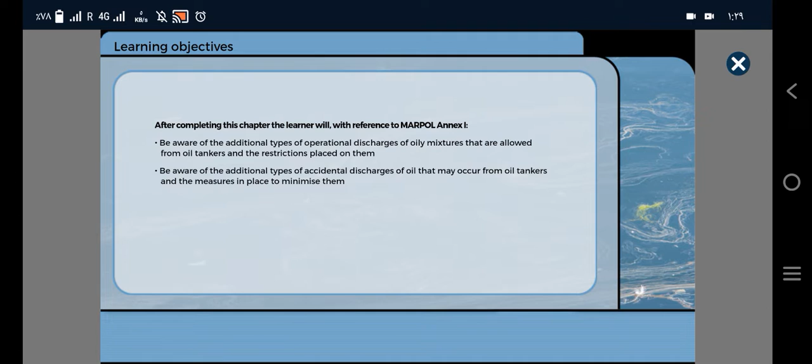Oil tankers make additional types of operational discharges of oily mixtures when it is necessary to dispose of water which has been mixed with oil cargo. This will normally occur when the cargo tanks need to be cleaned or ballasted.

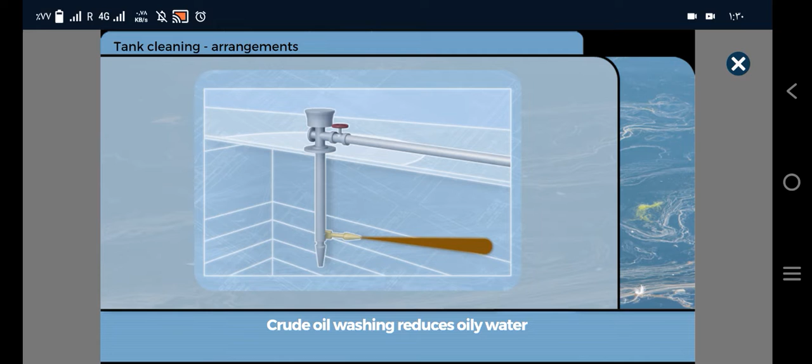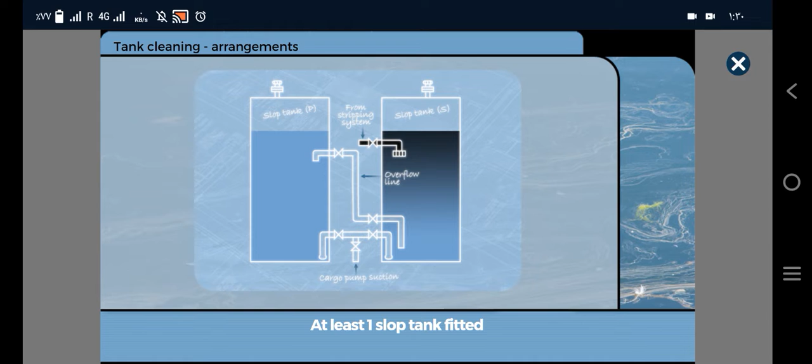Annex 1 requires most crude oil tankers to be fitted with crude oil washing systems, so water washing is used as little as possible. Even on a crude oil tanker, water washing of cargo tanks will be necessary sometimes. Annex 1 requires oil tankers to be provided with at least one slop tank to allow collection of tank washing water, and to allow the oily mixture to settle out before the clean water is discharged overboard.

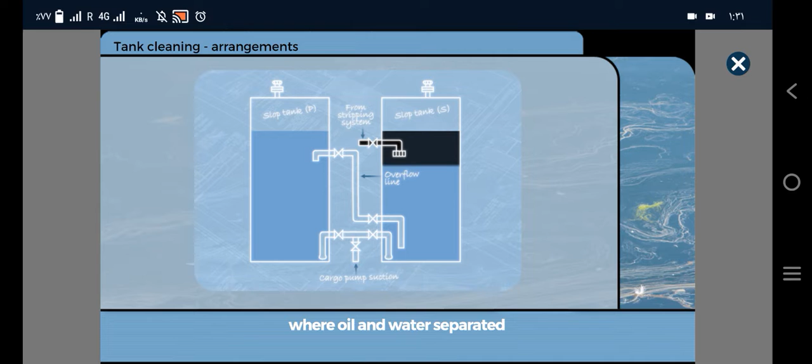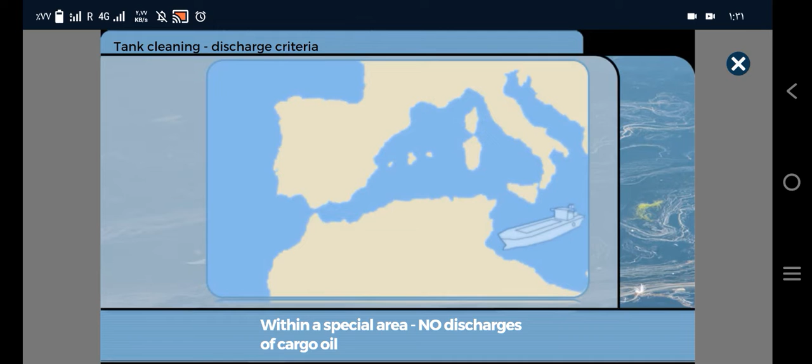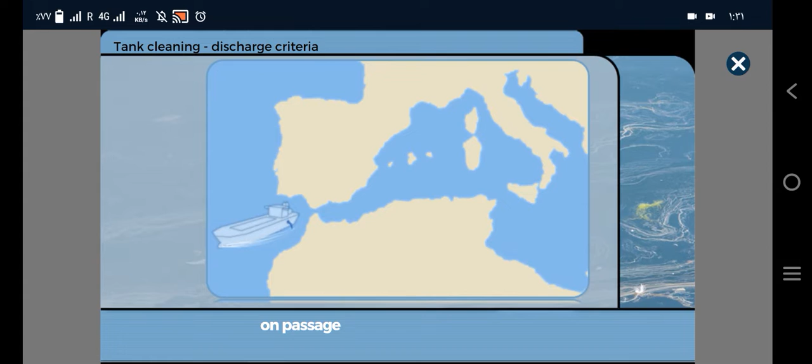The discharge criteria for tank washings are different to those for machinery space bilge water. Within a special area, no discharges of oil from the cargo area are allowed. Outside special areas, MARPOL has conditions that must be satisfied. These require the ship to be on passage, be a minimum distance from land, limit the rate of oil discharge, and the total amount of oil to be a small proportion of the cargo loaded.

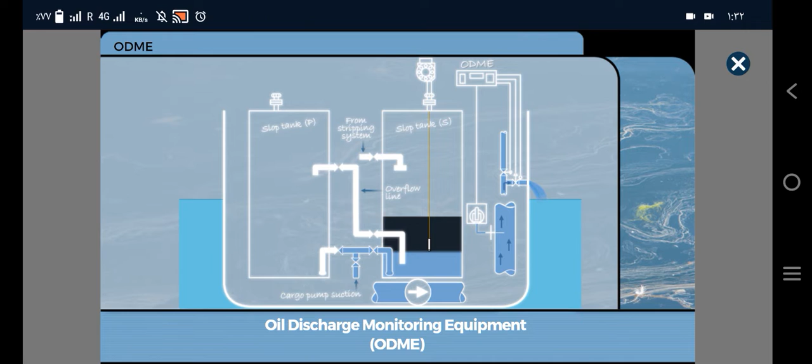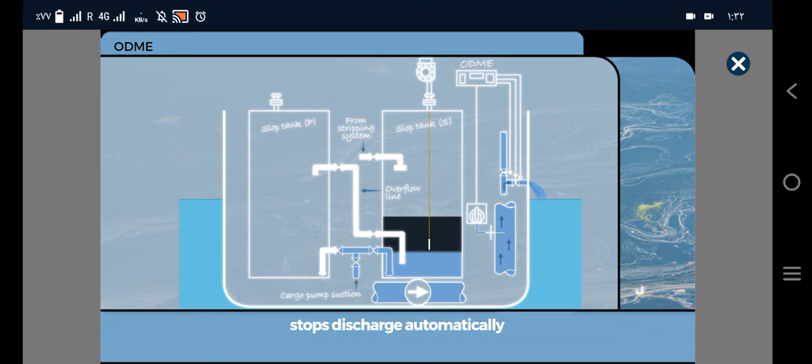The rate of discharge of oil and the total quantity discharged are measured using Oil Discharge Monitoring Equipment, ODME. In the event of the oil content exceeding a MARPOL limit, or the ODME failing, the overboard discharge will be stopped automatically. As a double check, oil-contaminated water from cargo tank areas is led to the open deck or to the ship's side above the waterline so that it can be visually checked for oil traces.

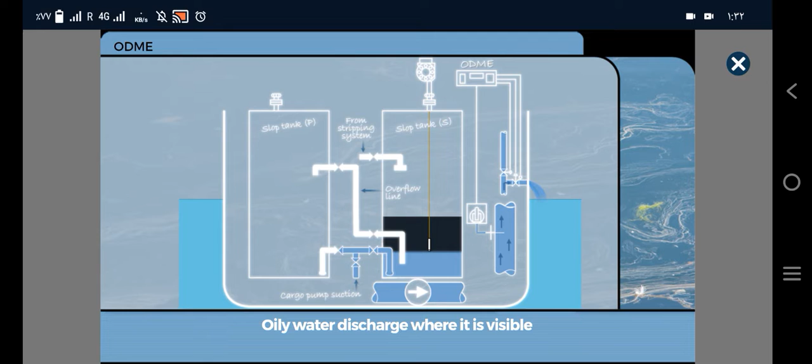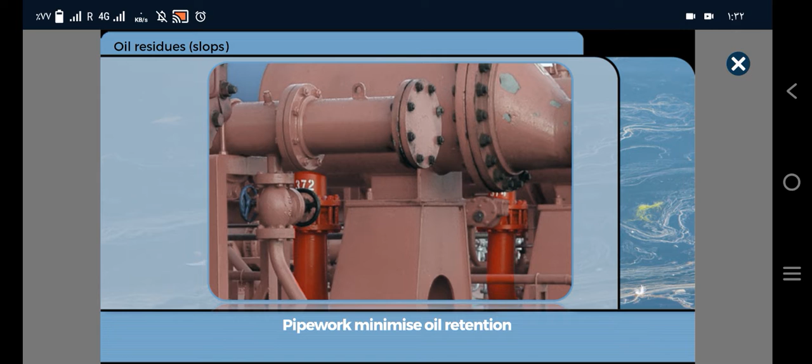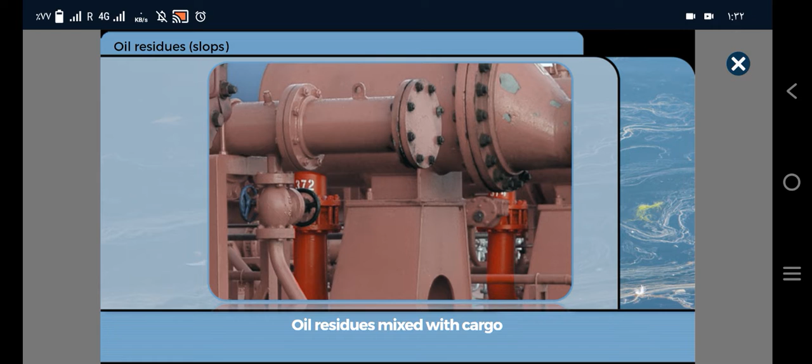Most crude oil tankers are required to be designed to minimize oil retention, and to have the means to drain pump and line residues so they can be discharged ashore or to a ship's tank. Sometimes the residues can be mixed with the next cargo. Otherwise, they will need to be discharged to shore reception facilities. A special small diameter line is provided to allow the residues to be discharged ashore.

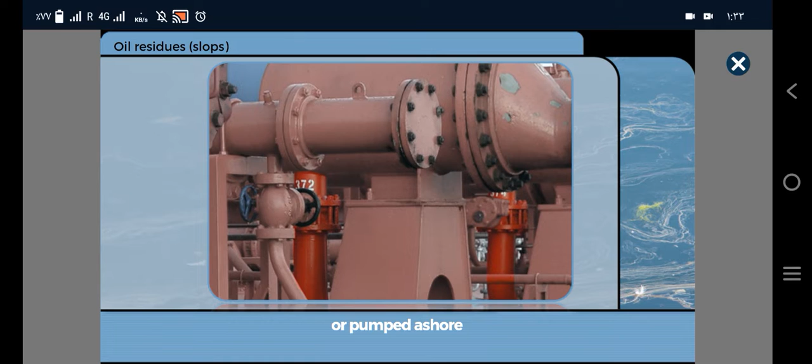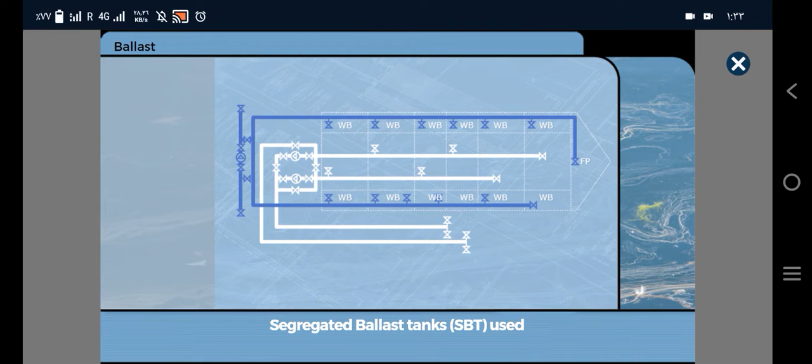Most tankers are required to have segregated ballast tanks and pipelines, so that ballast and cargo do not mix. An Oil Record Book Part 2, Cargo/Ballast Operations, must be completed each time any of the cargo or ballast operations listed in the front take place. The ODME is fitted with a recording device to provide a continuous record of the discharge.

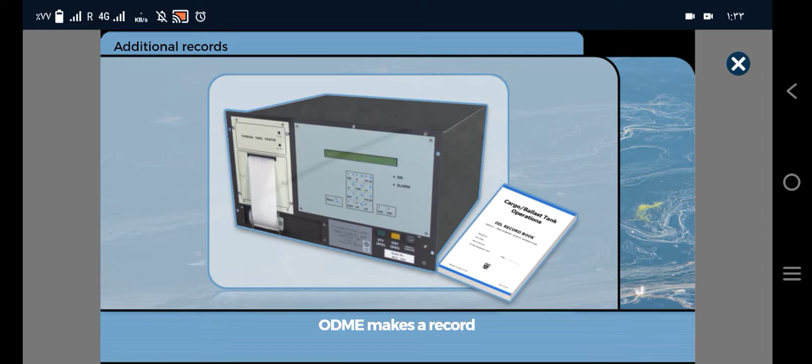Accidental discharges of oil may occur from oil tankers, such as spills during loading and discharge of cargo, especially during ship-to-ship operations, oil leakage following collision or grounding, cargo tank leakage, and leaks following other casualties, such as fire or explosion, hull failure, excessive list, containment system failure, submergence or foundering, wrecking or stranding.

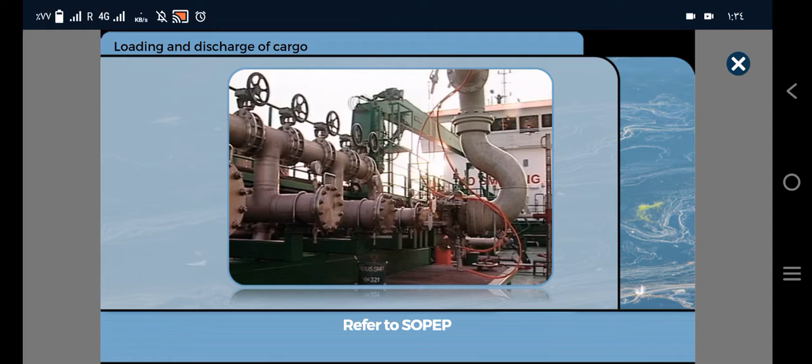Oil transfer spills on tankers are potentially much more serious than on other types of ships, and Annex 1 deals with both by requiring that a SOPEP is available on board. As described in the previous chapter, the SOPEP will provide directions on the immediate actions to take and contact details for the local authorities.

A new chapter has been added to Annex 1 to regulate the increasing use of STS operations. Oil tankers involved in STS operations have to carry an approved plan describing how to conduct STS operations. A qualified person should be in overall advisory control of STS operations.

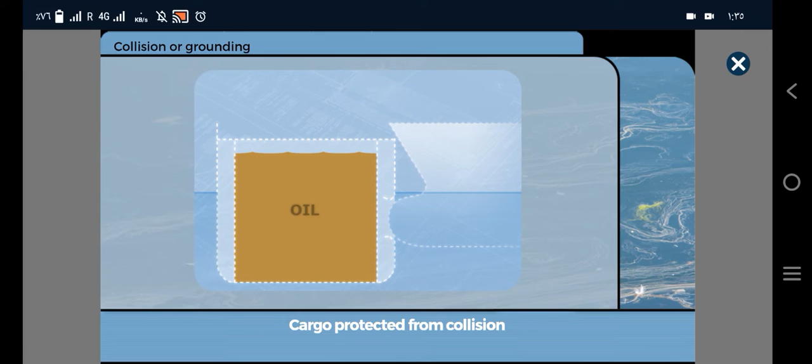Oil tankers have to have ballast or void tanks in a protective location outboard of the cargo to provide a measure of protection in the event of collision. Most tankers are now required to have a double hull, which also gives protection to the cargo from grounding. Carriage of heavy oils is now only allowed in double hull tankers. There are rules to improve the chances of the ship remaining afloat and stable following damage to a space.

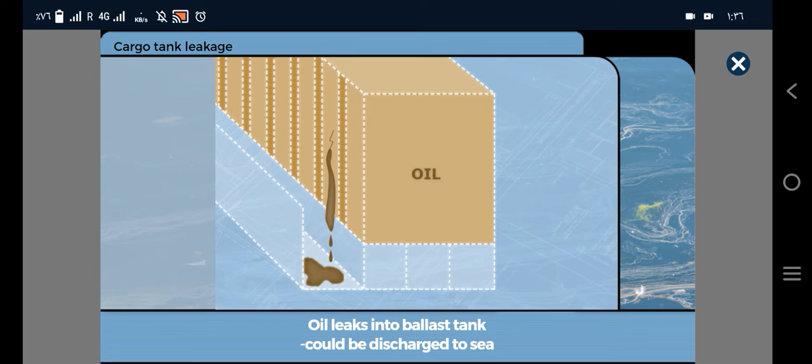Having tanks in protective locations also means that oil from a cargo tank may leak into a normally oil-free ballast tank, rather than directly into the sea. There is then a chance that the oil will be discharged with the ballast into the sea. The discharge of ballast water from cargo tank areas is required to be above the waterline, unless the surface of the ballast has been examined visually immediately before the discharge, to ensure that no contamination with oil has taken place. Any ballast found to be dirty must be treated as if it were tank washings.

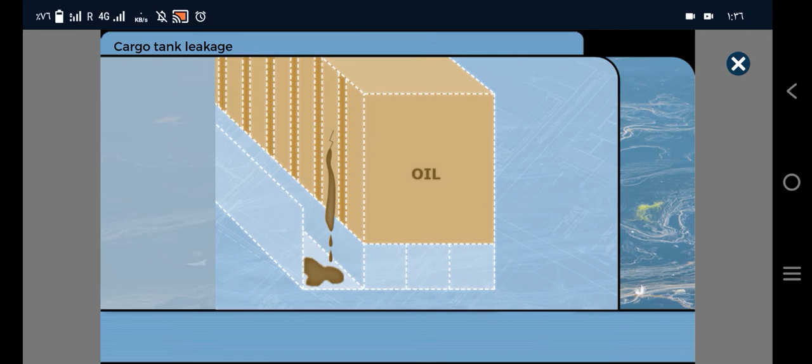To minimize pollution from other casualties, there are rules requiring technical assistance to be available ashore. But the SOPEP contains the necessary immediate actions.

We have now reached the end of this chapter on MARPOL Annex 1 as it applies to oil tankers. We have considered the likely sources of operational and of accidental pollution from oil tankers, and how Annex 1 tries to prevent environmental damage from both sources. Before moving on to the next chapter, you should complete the following self-test questions to check what you have learnt in this chapter.